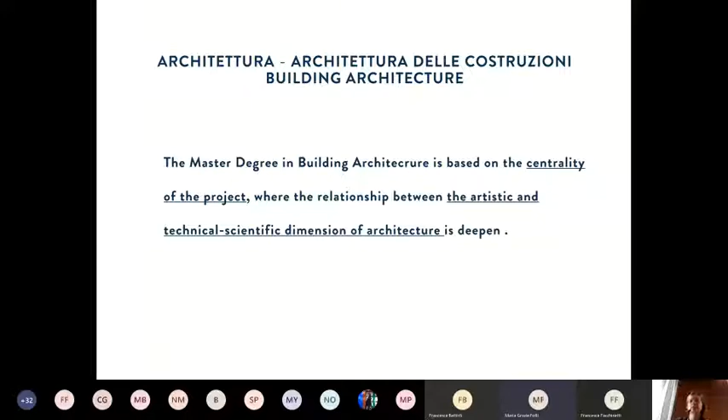So, a brief introduction to this master course. This master degree has a main objective to work on the project, and in particular to deepen the relationship between the artistic and the technical-scientific dimension of architecture. Our goal is to prepare European and world architects who are able to respond to the complexity of problems related to design, construction, and preservation. You will see these three words present throughout the organization of the master degree.

We believe it is fundamental to have all the knowledge from the architectural and technical point of view to approach the complexity of the design of architecture. We will discuss in our courses and studio about form, language, typology, structure, and appropriate construction techniques. So we want to study all the ingredients that are in a project of architecture.

The studio is the center of this master degree, a place of comparison and synthesis of all the disciplines. What is specific to this master degree is that in the studio there are 3 to 5 teachers present. They teach different modules and subjects, but work together with the students and guide them to the definition of the architectural and executive details.

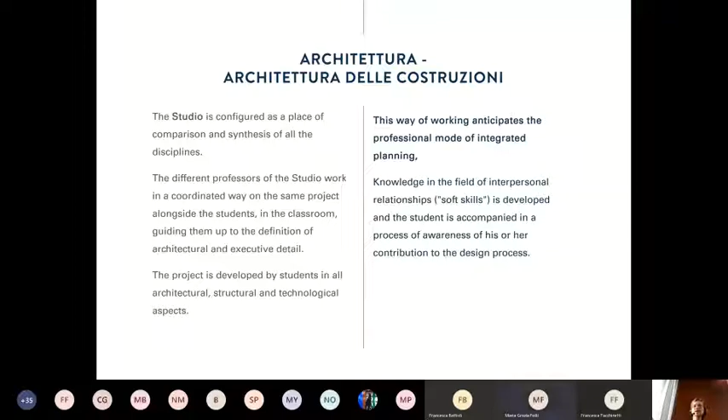As I said before, we have two different paths: one in Italian language and the other in English. You can find all the information you need, also a lot of master degree works and drawings from the studio and so on, on our website www.architettura-delle-costruzioni.polimi.it. I also put this presentation on this website.

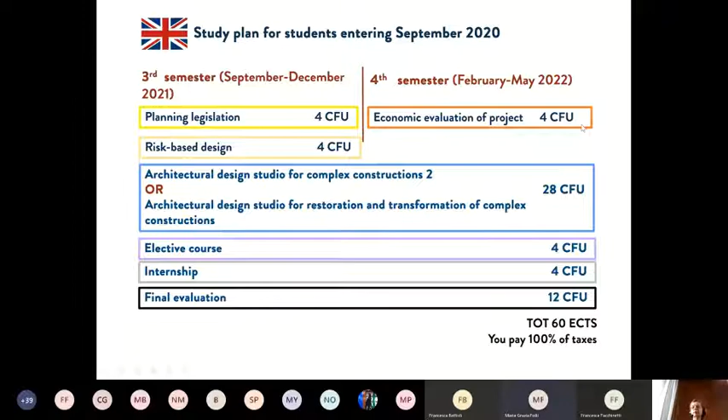The same study plan is present in the Italian path. The only difference is in the laboratory of the first semester, because instead of the construction studio, here we have Laboratorio per la conservazione delle architetture complesse. But all the other monodisciplinary courses, integrated courses, and studios are exactly the same. The structure is absolutely the same as the one I described for the building architecture path.

Next year we will have two visiting professors. One is Professor Maurizio Sabini from Drury University in the United States, who will teach in the Laboratorio di Architettura delle Costruzioni Complesse 1 in the Italian path, as well as in one of the two sections of the architectural design for complex construction studio of the first year, second semester. Parallel to Maurizio Sabini, in the other section of that studio, we will have Professor Cohen from Maastricht University.

Some information about our graduates: this is related to the year 2017. More than 90% of our students are now working as architects, they found a job in less than 6 months, and the net salary is around 1,200 euros.

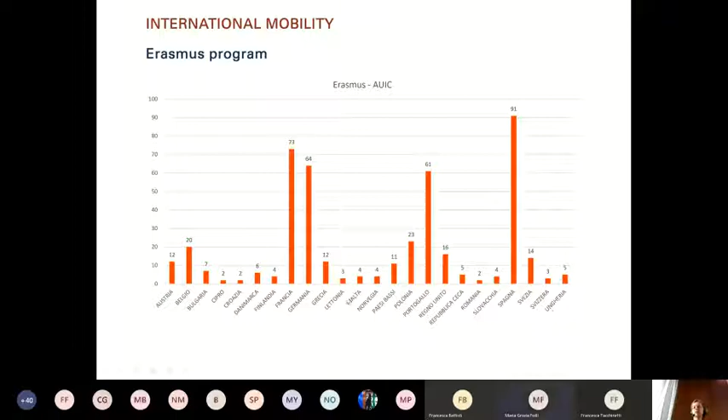The course also offers you the possibility to make exchanges in Europe with the Erasmus project. Here are all the other universities in connection with the Polytechnic of Milan, and a list of states where you can go through the Erasmus project. You can also go abroad all around the world thanks to many bilateral programs with extra-EU universities.

As I told you, I will put this presentation on the website of the course, so we can take the link from that and see what they are communicating about the next possibilities.

In any case, in September there will be strong work by our office devoted to the Erasmus project to explain all the possibilities and what will happen in the near future for Erasmus students.

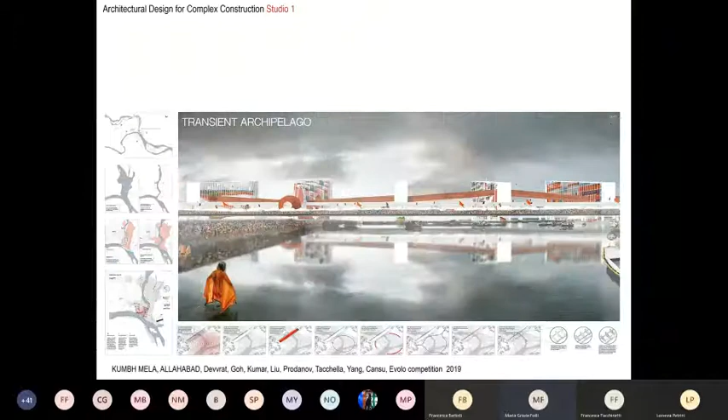First of all, I would like to say that the teaching and learning of the studios - their contents, methodologies, themes, and goals - are strongly related to reality. We consider with attention the reality, its situation, needs and urgencies, because reality is the frame in which architects work.

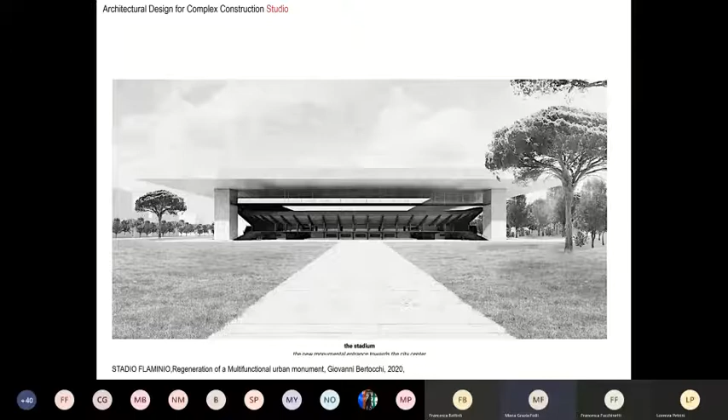And in which we can understand what are nowadays the conditions, opportunities and tasks for the profession of architect, and then the useful and necessary skills.

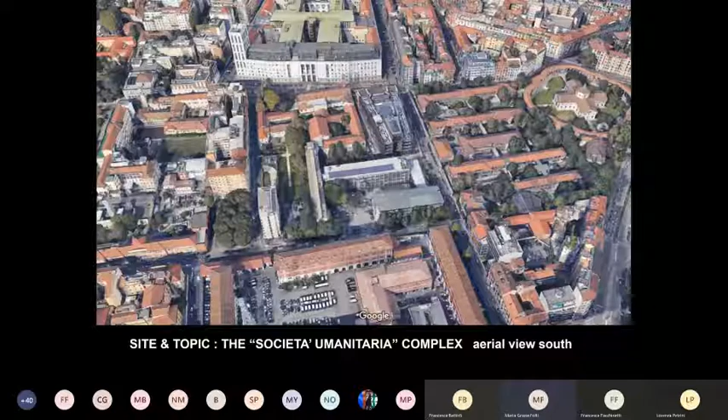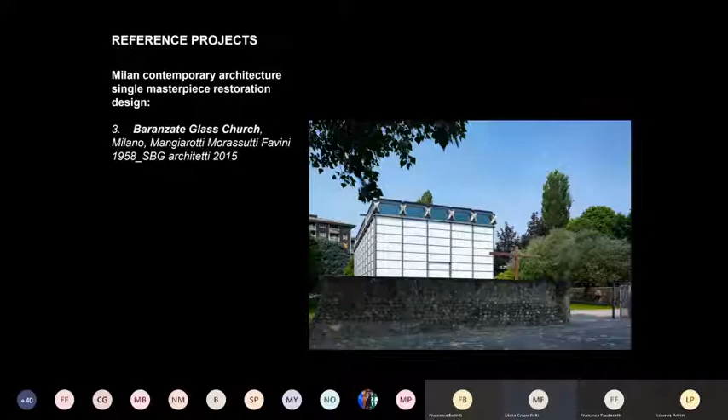Everywhere in the world, the scenarios we live in are very complex, unstable, critical, full of problems that require solutions. Some of these problems are specific architect duties. Indeed, only architects have the arduous but very fascinating responsibility to preserve, transform and improve the living spaces, taking care of the existing and designing new sustainable buildings.

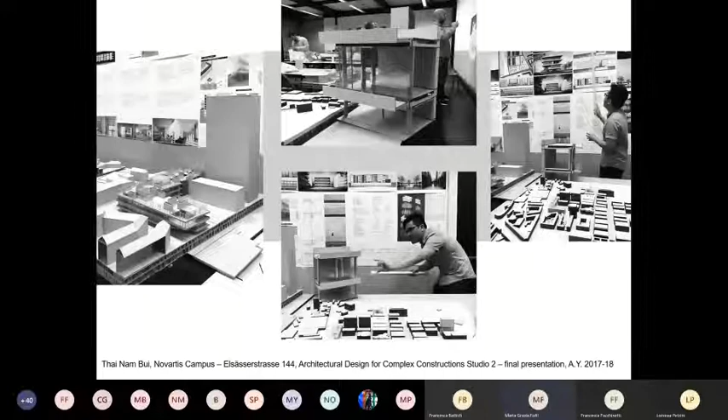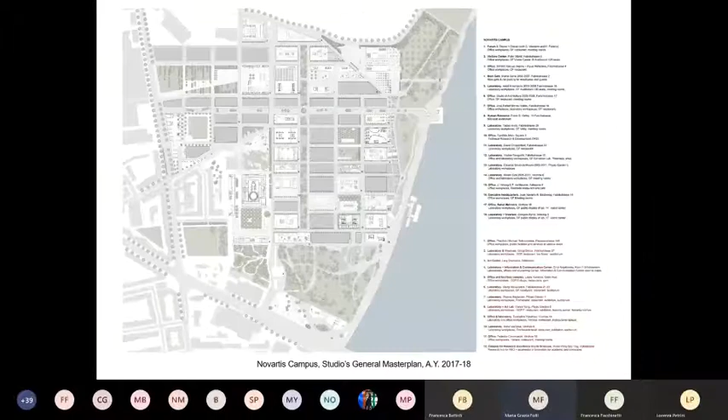I use the adjective sustainable in a broad sense. Sustainable means consistent with the needs of people and environments. Sustainable because responsible towards the aesthetic, constructive, functional and economic dimensions of each architecture.

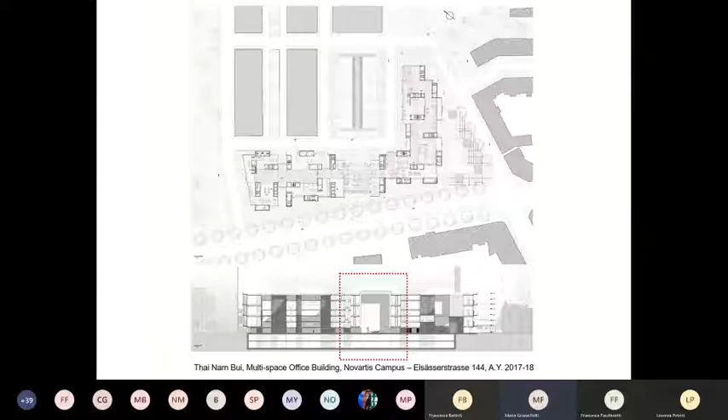So a sustainable design for a resilient future involves a conscious figure of architect, equipped with theoretical and technical skills essential for interacting effectively with these difficult realities, having a clear vision of the present and the future.

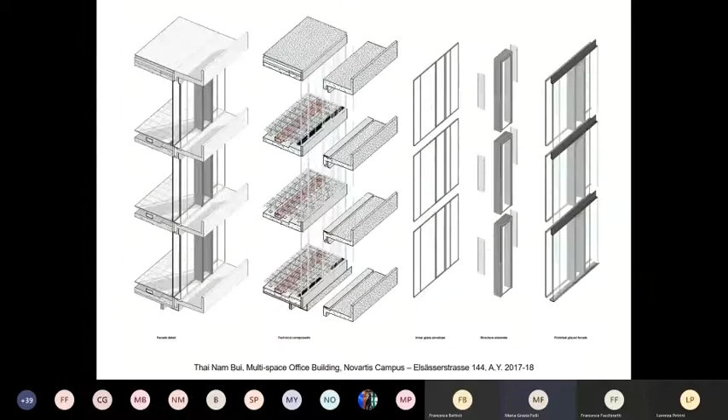So methods, disciplinary paradigms, and contents of the studios are strongly finalized to this cultural and ethical approach, allowing the basic knowledge about form, structure, and function and their fundamental interaction. It must be clear that in responsible building, beauty must incorporate the wisdom of building, the care of resources, of natural and anthropic environment, and of the past heritage of human needs.

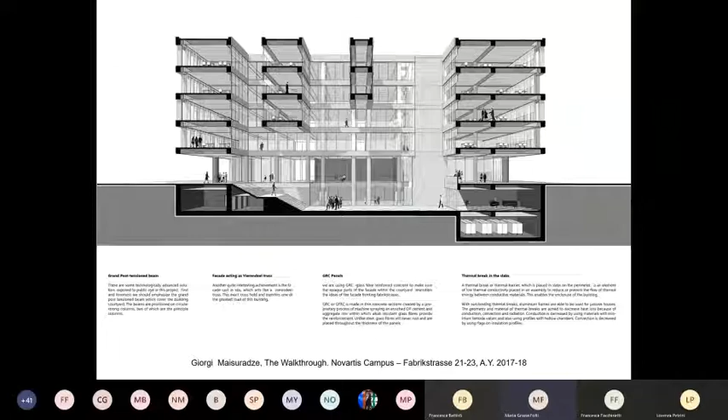For these reasons, our studios are characterized by the interdisciplinarity of the teaching. Monodisciplinarity, or the accumulation of many single knowledges according to the encyclopedic model, has proved insufficient to understand the complexity of reality and to act in it.

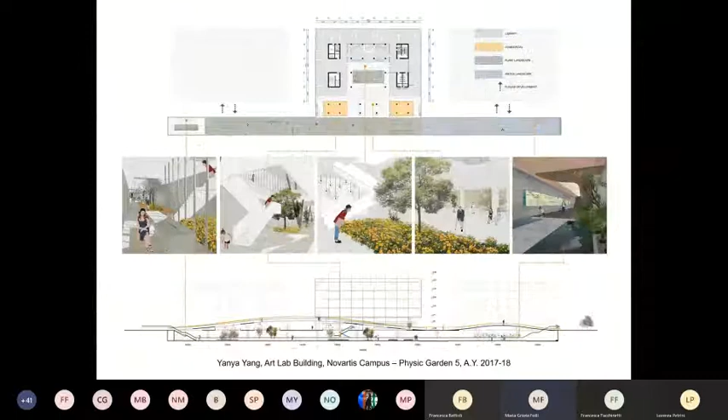On the contrary, it is precisely the interaction between knowledges that can give architects the tools able to conceive the general architectural idea and to develop it, controlling the whole design process, because it is always the architect who is the director in the development of the entire project design.

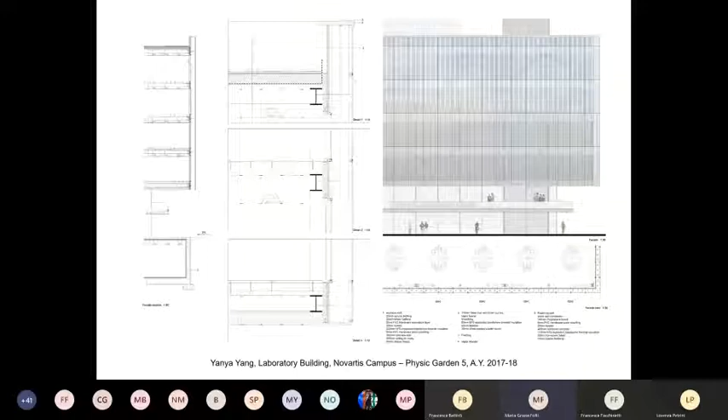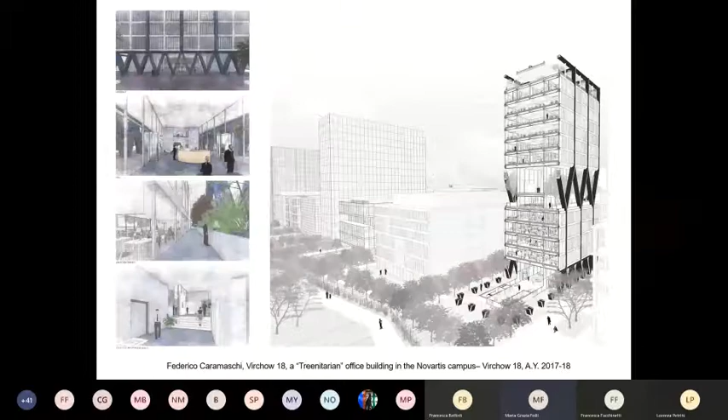Then the laboratories are composed, as explained by Professor Petrini, of different disciplines, of technical and humanistic teachings, in the tradition of that scientific humanism strongly related to the needs of societies that has characterized the Polytechnic culture from its origin at the end of the 19th century.

The combination of disciplines changes in relation to the aims of the different studios, which constitute the two-year master training offer. Some studios are mandatory, others are optional, allowing students to deepen areas of knowledge and experience according to their interests and aptitudes.

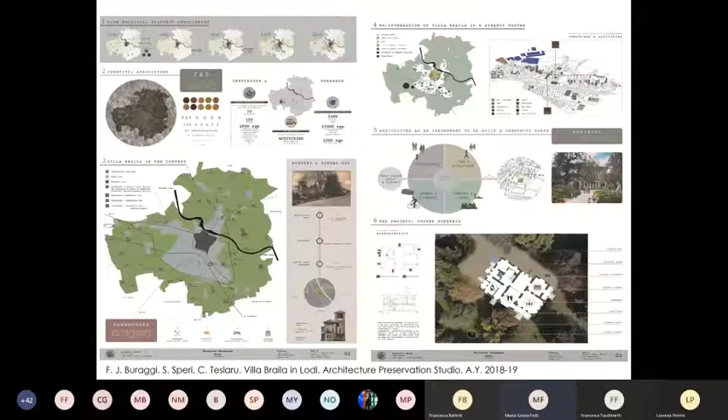The studio activities always include lectures, design research, and workshops that face, depending on the studio's aims, the project of new architecture, the project related to the preservation of heritage, or the project of restoration and transformation of the existing.

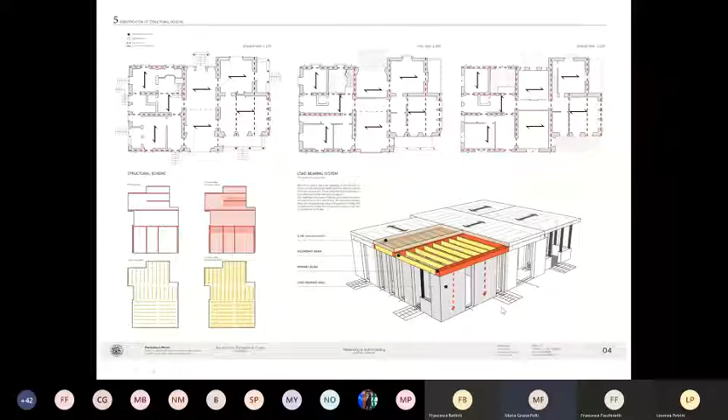The first year is characterized, as explained, by disciplinary courses and by the centrality of two studios. The first one, in the first semester, can be chosen by students between two options.

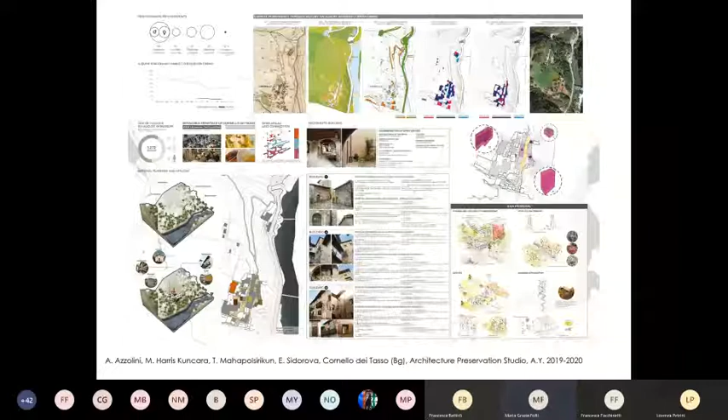The architectural construction studio aims to develop the ability to integrate fundamental technical skills to support the architectural design process. These skills are structural and technological competencies, and 3D surveying and mapping abilities.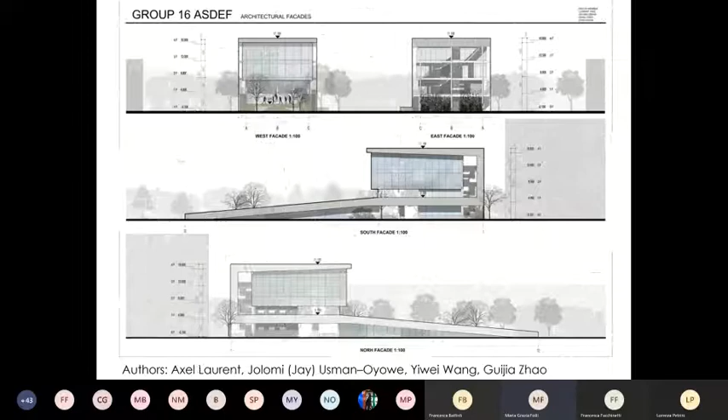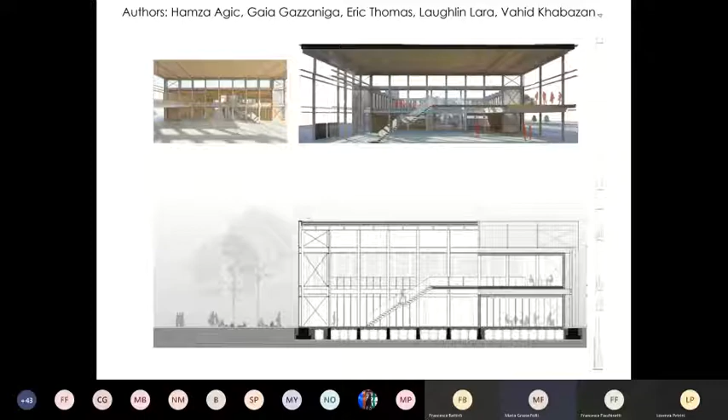In the studio, restoration, reliability and vulnerability, and site survey provide knowledge and conceptual techniques for the protection, restoration and enhancement of historical buildings. This means learning how to deal with the conservation of these buildings, but also how to give this architecture an active role within contemporary cities and landscapes.

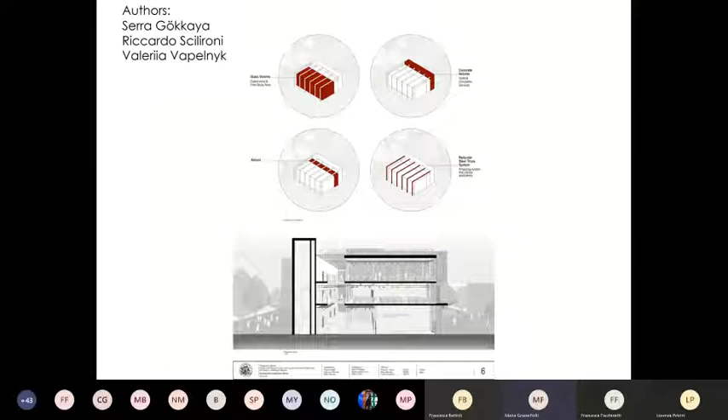In the second semester of the first year, the architectural design for complex construction studio allows all students, because it is mandatory, to tackle the design process of a new building through the integration of architectural design and composition, structures, technology, and the design of the built environment.

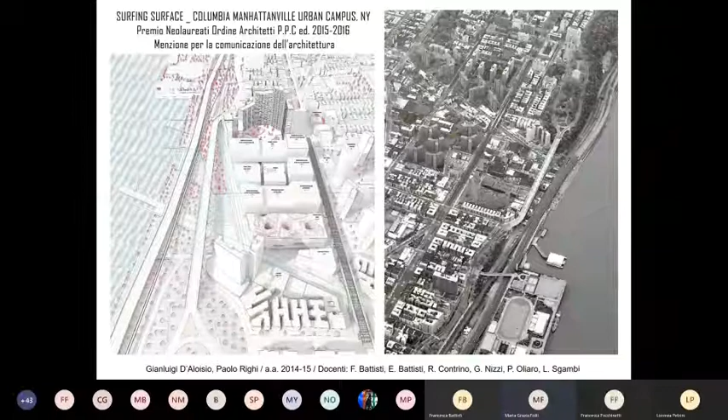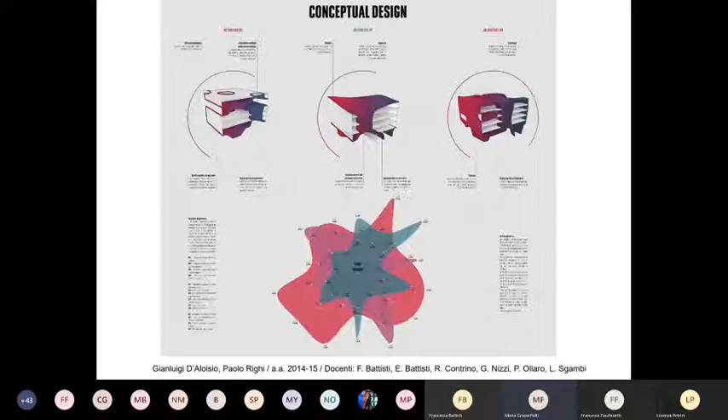The disciplines work together, addressing themes and places chosen because they are strategic, relevant, topical, real situations that require responsible interventions. As a project, the student will face dealing with real urban transformation, participating in international competitions, interacting with public administration, with external experts, etc.

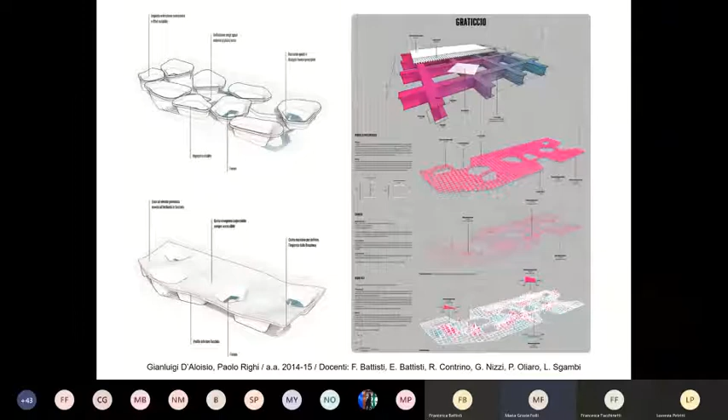The project will be approached with conceptual concreteness. It is essential, first of all, to build ideas and goals aimed at representing cultural, aesthetic, symbolic and functional values, because this is the civic task of each piece of architecture.

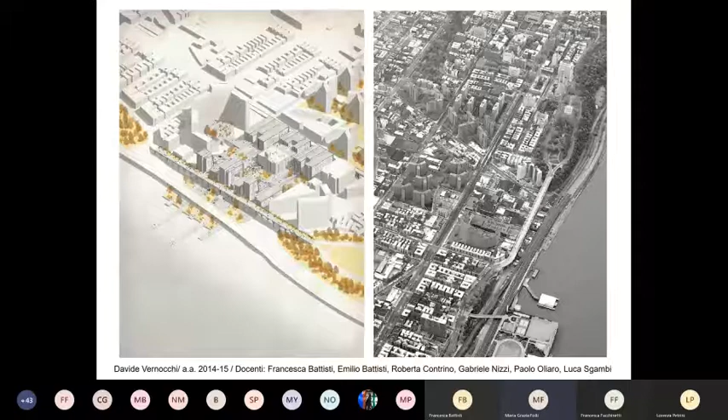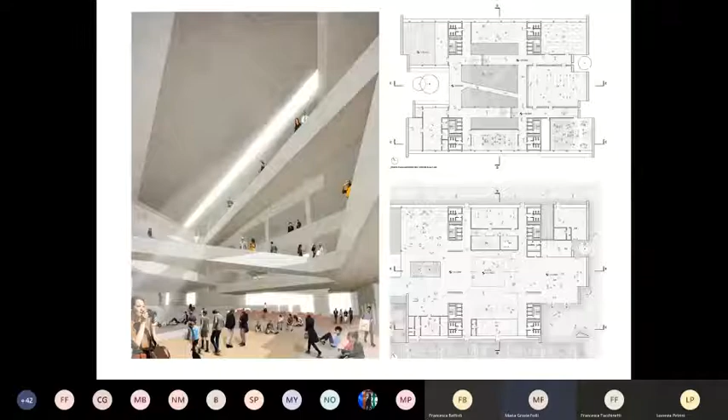The ideas, in order to become sustainable architecture, must use the most advanced structural and technical knowledge, as well as innovative typologies and languages, and also digital tools such as building information modeling, which allows a new form of interoperability between the different components and actors present in each project.

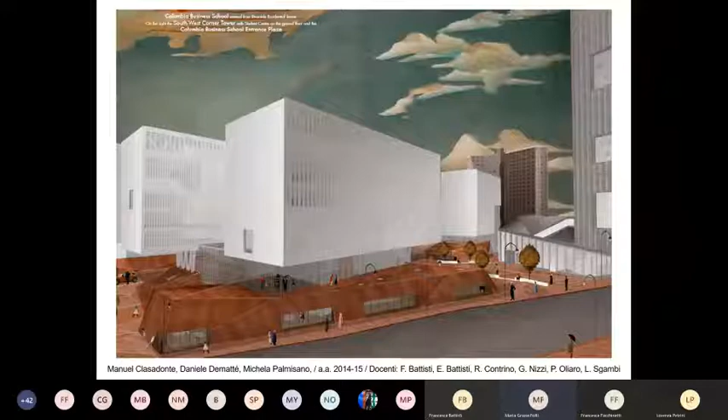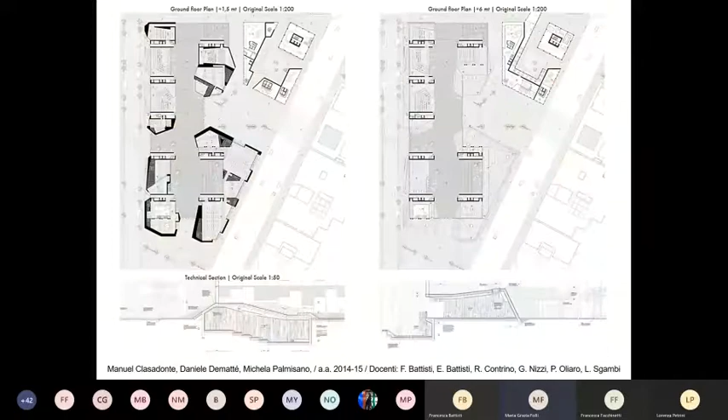In the second year, students take a one-year single laboratory, having the choice between two orientations. One is the continuation of the first year architectural design construction studio, and this second year of the laboratory will have the same methodology, but with more disciplinary integrations: to architectural design, structure and BIM are added building services design and innovative materials.

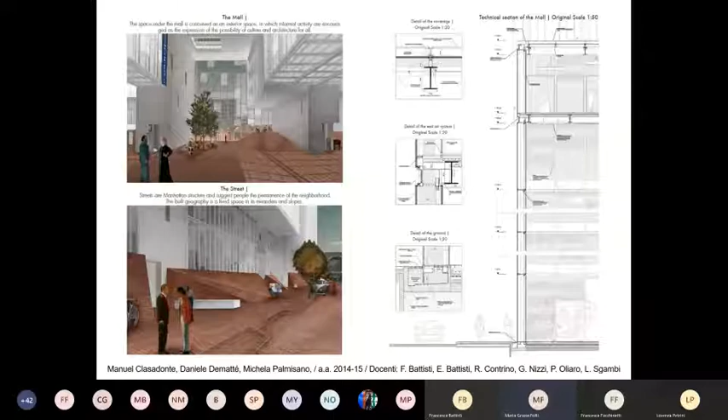The themes and aims will be different from those of the first year, to ensure students have more design experiences, facing an ever higher level of complexity towards the final degree project.

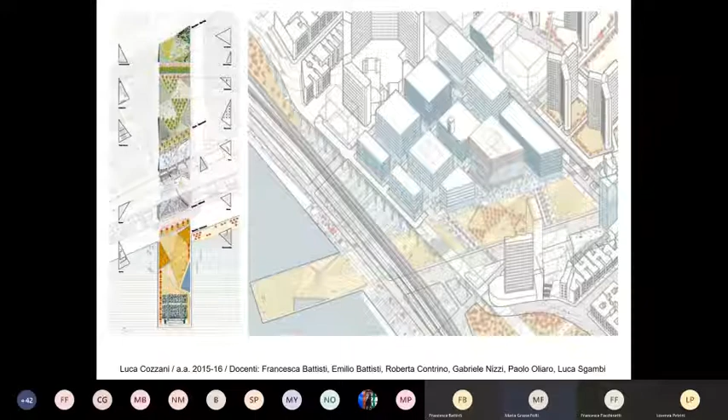The other option is the architectural design studio for restoration and transformation of complex constructions, in which, alongside architectural design, structure and BIM, are present disciplines such as restoration and materials for preservation.

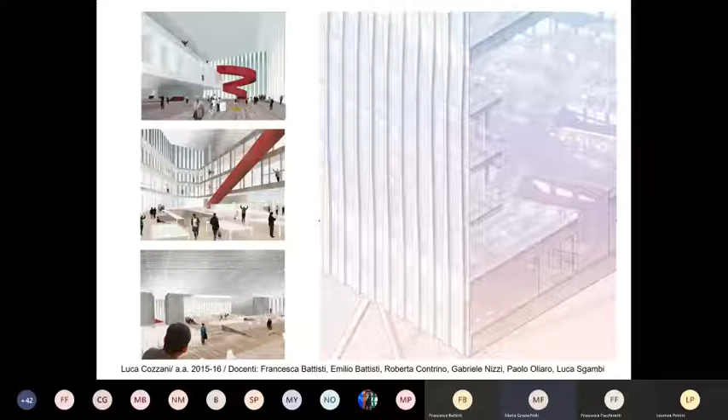Everywhere there are many important ancient or modern buildings that require interventions, not only for restoration, but also for adaptation to new uses, which require modification, extensions, additions, etc.

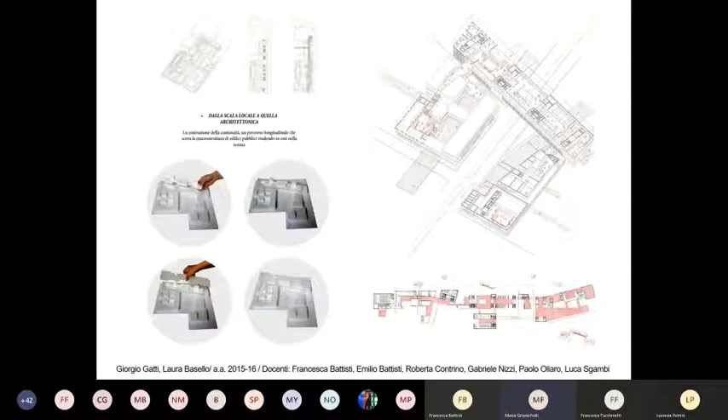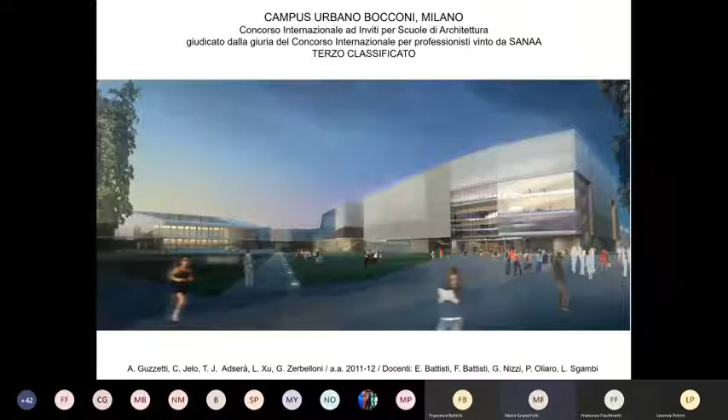This studio deals with the important issue of the dialectic between restoration and new construction, defining and teaching theoretical and practical tools that aim to resolve, in a unity of purpose, the relationship between the culture of conservation and the culture of the project of new building.

It means, and this is very interesting, working on the congruence and integration of forms, languages, techniques and materials belonging to the past and to the contemporary.

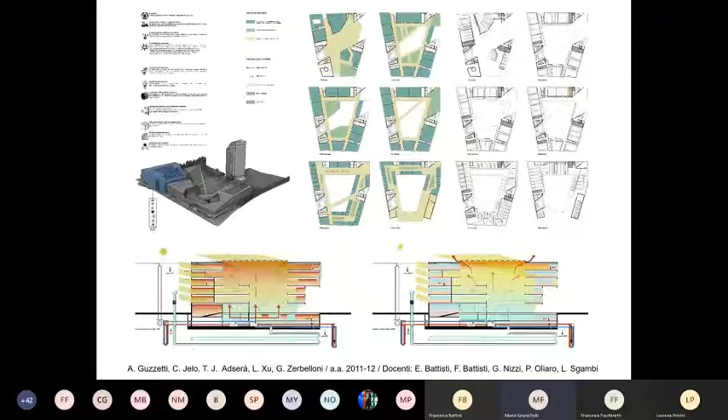The final consideration concerns the interaction between teachers and students. This ambitious framework doesn't work if a strong mutual exchange is not established between teachers and students, and between the students themselves.

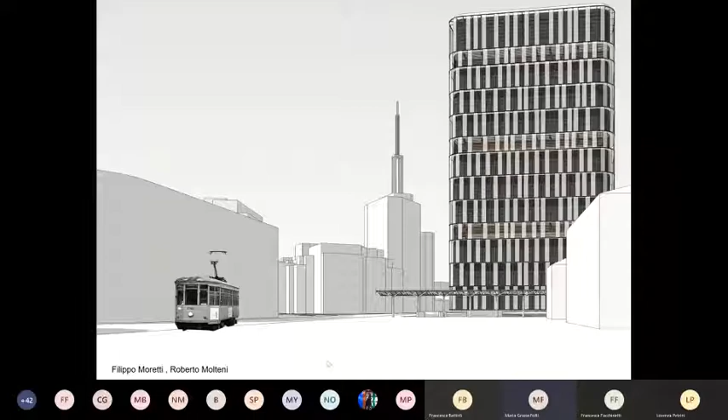It doesn't work if the passion for architecture is not shared, as well as the purpose of developing the project together, with effort and enthusiasm.

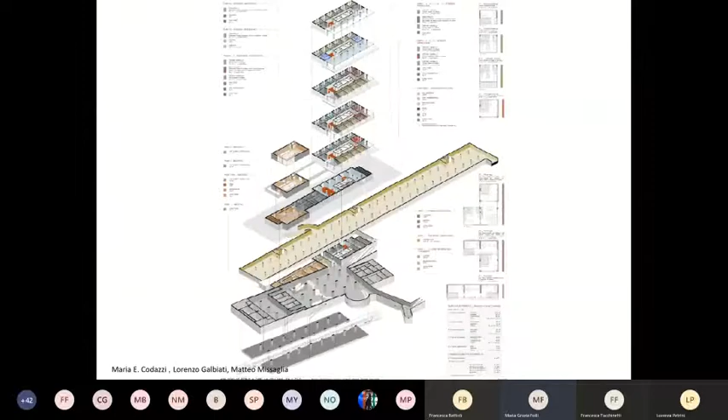The internationality of the course of study and the wealth of different cultural backgrounds of students is an added value which increases the interest in debate, confrontation, and openness to the whole world. It is, I think, a virtuous condition that will promote attitudes and abilities of rationality and imagination. Also, the possibility to dream, which is essential for any creative process.

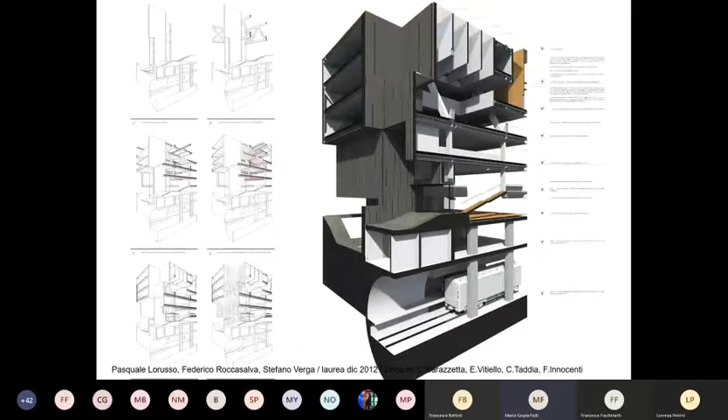And the very last thing I would like to say is about after graduation. The training based, as I said, on the interaction with reality using effective and innovative tools is highly appreciated in the world of work. And despite the difficulties of this historical moment, many of our graduates are working with a great level of success, in the most important international firms, or with the same success are working for themselves.

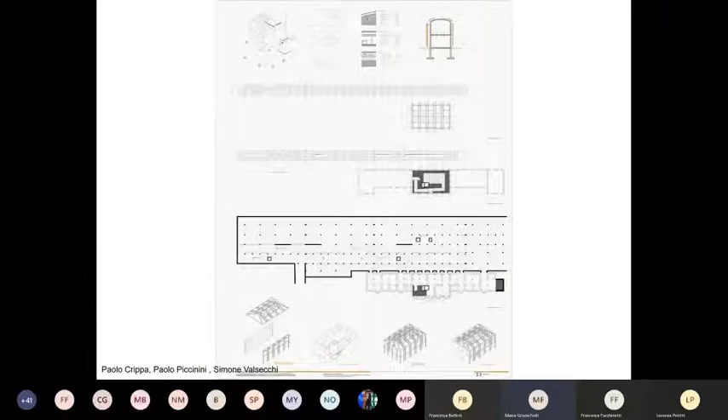Others, with equal satisfaction, are pursuing PhD courses and study and research activity. Then I think that it's very important for the master students to have a clear idea of the possibilities about their future.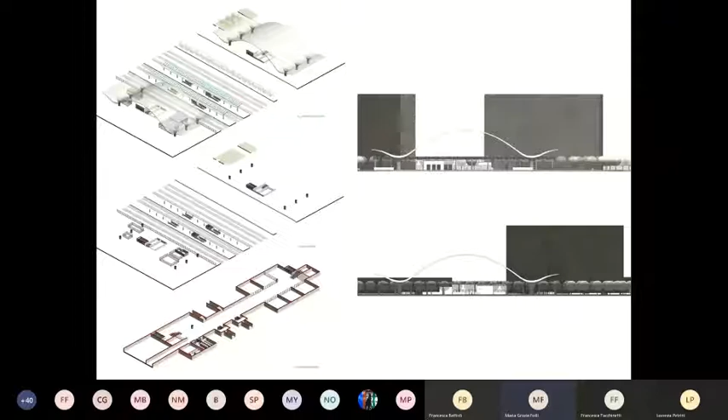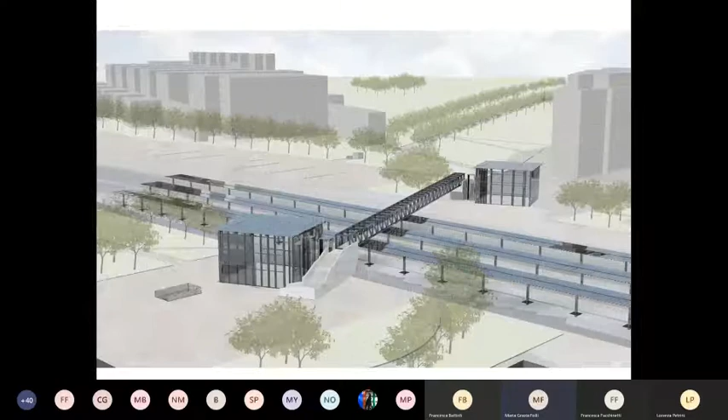Now it could be useful to listen to the brief intervention of some students who are taking these studios and can describe their experience. I hope I was helpful and clear enough. I am available to answer your questions, and I thank you very much.

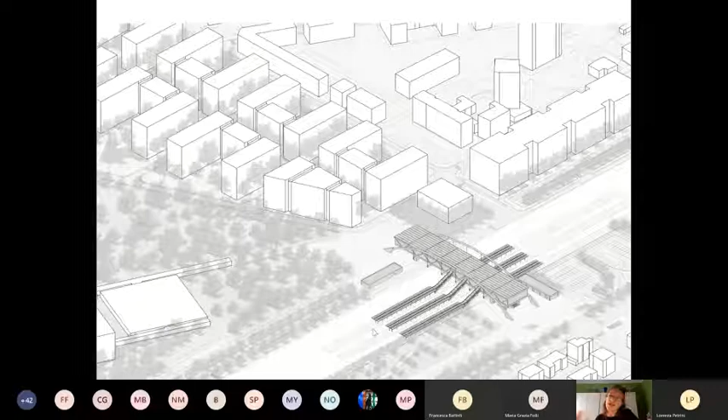Thank you, Francesca. Okay, hi everyone, I'm Francesca Facchinetti, and I'm attending the first year of the building architecture course. I decided to attend this course because I thought this would be the way to learn new insights in architecture studies and apply them in future projects. As the professor said before, I learned different knowledge that is now of service to the project. So this is why I decided to attend this course, and now after the first year, I'm able to affirm that this is what I was looking for, and my hopes have been fulfilled.

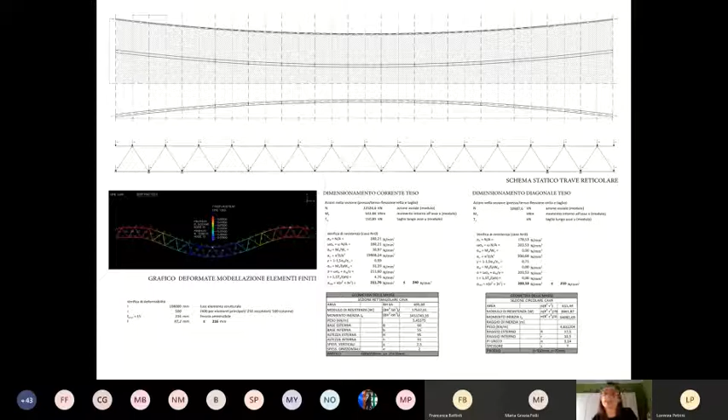Furthermore, I acquired new fundamental skills, and as I said before, now they are part of my project and so part of my laboratory. Thank you.

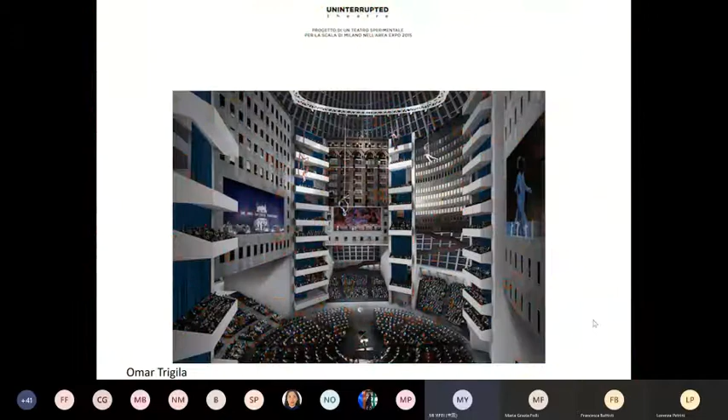Good morning, everyone. I'm going to talk a little about my experience during the semester in the course Architecture Design Studio for Complex Construction. Actually, this is my first attempt to design a high-rise building, and I have not been exposed to this content in previous courses. When I listened to the professor's introduction for the first time in class, I found that there are many differences between high-rise buildings and other types of buildings.

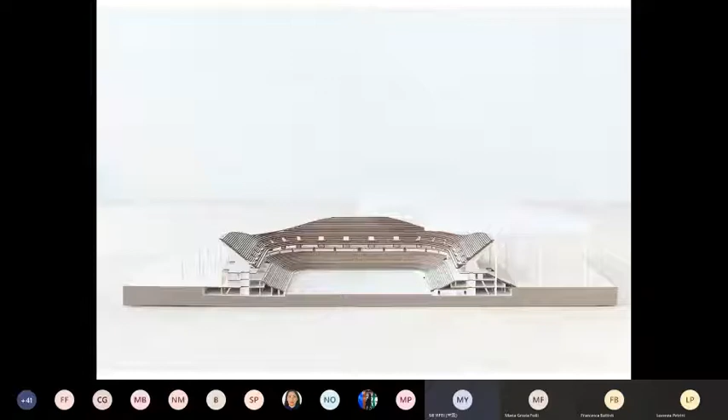First of all, the development of high-rise buildings changes slowly with the development of social needs and technology. On the other hand, the functions of this type of building are very mixed and can include many different functions, but this will also affect the subsequent design—for example, how to implement these functions at the same time without being affected by each other.

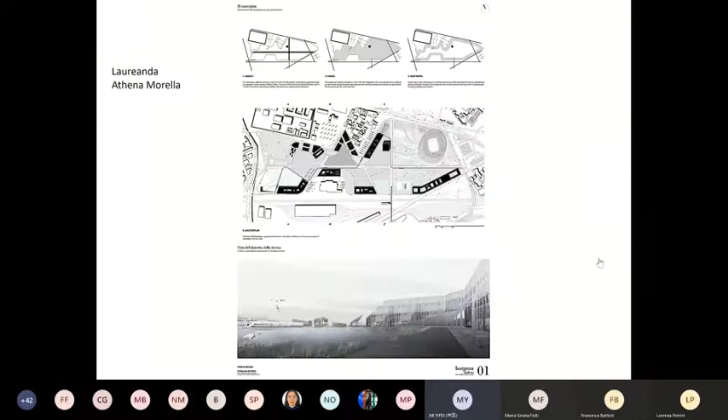The design made by my colleagues and me is based on the current special circumstances. We try to design a high-rise building with flexible functions, usually including business, hotels, activity centers, and other functions, and in an emergency it will be used as a medical building as a whole. In the whole process, I think the most difficult places are the relationship between the ground floor and the city, the scheme, and the structure of the building.

For the urban relations, a high-rise building needs to be in harmony with its space first, but it can also bring some benefits to the surroundings. Our base is alongside the Huangpu River in Shanghai, so the ground floor needs to connect to the river and the city, and the ground floor should be more open and should play an active and connected role.

The scheme needs to consider not only the lighting problem, but also the structural support of the glass. We use the double layer method and found that the relationship between the outer layer and the inner layer is the most important one, because the inner skin can be seen on the side. In terms of structure, it's necessary to consider not only the impact on internal spaces, but also whether it can support the entire building. In this regard, we tend to ignore the vertical structure support, but it's not possible to support high-rise buildings with only the core.

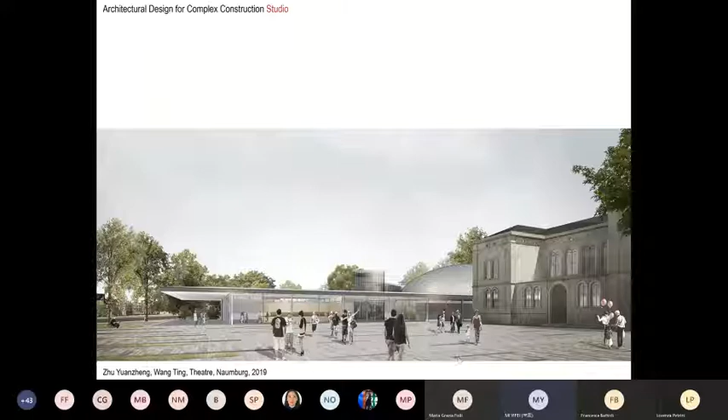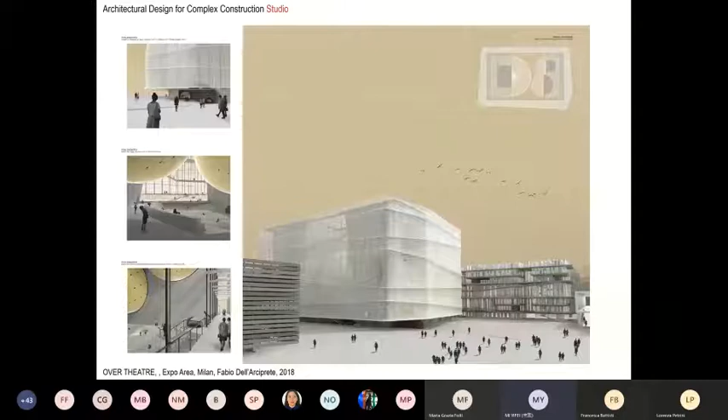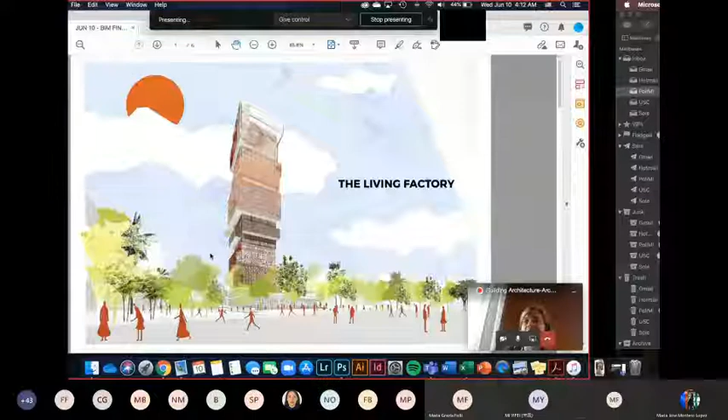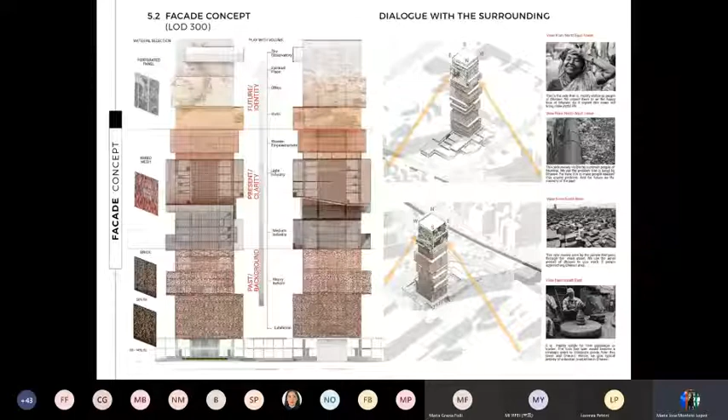What I like the most about this project and this course, adding to what my previous colleague said, is the integration of design with the BIM environment. Professor Folli has really made it an important point to have us think about the design and how it impacts the users, the visitors, and the urban development of the area.

So we have gone from a macro to a micro area, but thanks to the BIM environment and our teachers in that side, we have also learned these very specific tools that for the first time, at least in my career, I have been able to apply.

In the exact building that I am designing. So as opposed to just learning the tools on one side and learning to design on the other, we have married the two together, and at least for me, this has made the learning experience much more enriching.

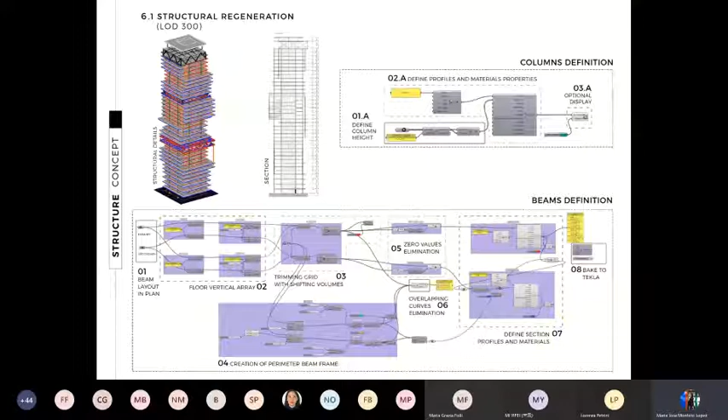I did want to say that it is a little unfortunate that we've had this semester at a long distance, but thankfully some good things have come of it. Learning to work with people all around the world and managing different schedules has been incredible, and I think it's going to be a really useful tool if we want to work internationally in the future. Thank you very much, and thank you to Professor Folli as well.